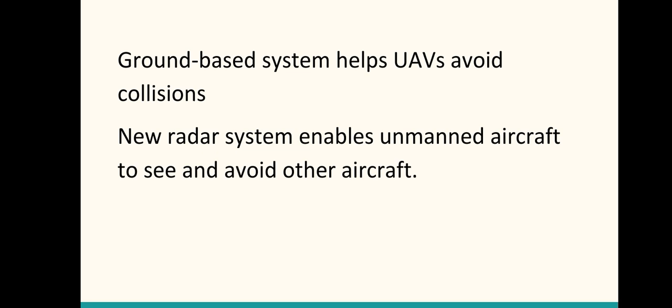The Federal Aviation Administration (FAA) is averaging more than 100 reports a month of interaction between unmanned aircraft systems and commercial or private planes. This statistic gives cause to ask, how can unmanned aircraft avoid in-air collisions?

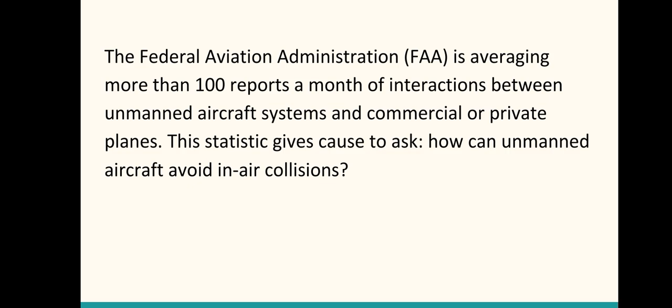For an unmanned aircraft system (UAS) to fly in civil airspace, it must be able to see, avoid, and remain well clear of other aircraft. With no pilot on board to spot approaching aircraft, another sense and avoid (SAA) technique is required.

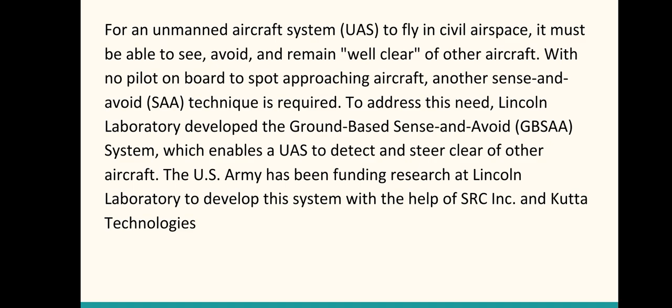To address this need, Lincoln Laboratory developed the ground-based sense and avoid (GBSAA) system, which enables a UAS to detect and steer clear of other aircraft. The US Army has been funding research at Lincoln Laboratory to develop this system with the help of SRC Inc. and Kutta Technologies.

Rather than using onboard sensors, which are still in the development phase, to provide the location of neighboring aircraft, the GBSAA system uses existing radars to locate nearby aircraft, including those not tracked by FAA systems.

Data gained from the radars are processed by unique algorithms so that the system can locate and prioritize the risk from all aircraft, and then issue alerts to the pilots of the UAS at risk and compute the optimal avoidance maneuver.

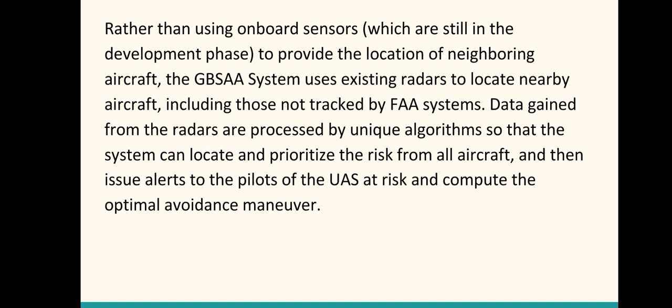This arrangement allows the GBSAA system to provide sense and avoid services to any size UAS flying within radar coverage without requiring the UAS to carry additional equipment.

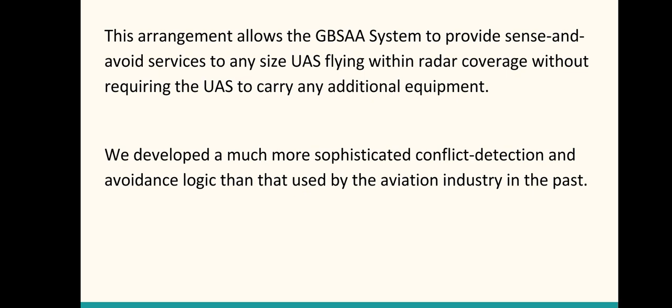We developed a much more sophisticated conflict detection and avoidance logic than that used by the aviation industry in the past. Lincoln Laboratory's developments in system architecture, threat detection, maneuver algorithms, and analysis in this program combined to offer an important advancement in the UAV industry.

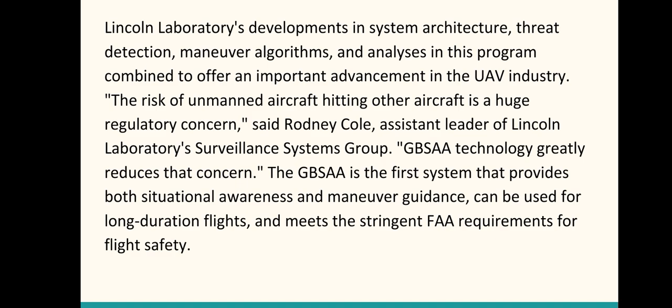The risk of unmanned aircraft hitting other aircraft is a huge regulatory concern, said Rodney Cole, assistant leader of Lincoln Laboratory's Surveillance Systems Group. GBSAA technology greatly reduces that concern. The GBSAA is the first system that provides both situational awareness and maneuver guidance, can be used for long duration flights, and meets the stringent FAA requirements for flight safety.

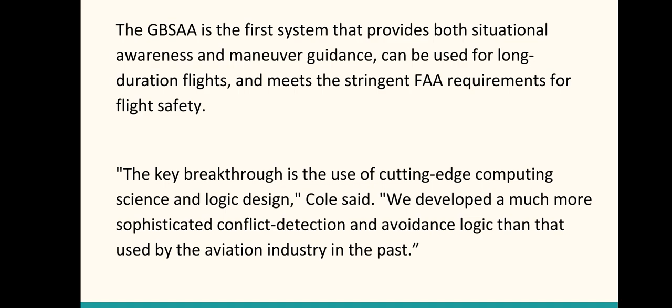The key breakthrough is the use of cutting edge computing science and logic design, Cole said. He said they developed a much more sophisticated conflict detection and avoidance logic than that used by the aviation industry in the past. The logic uniquely assesses not only the current location and velocity of each aircraft, but also the

uncertainty in these data and potential future threat aircraft maneuvers to determine the threat posed by each nearby aircraft, an optimal set of maneuvers for the UAS to regain a position of well clear, a priority ordered list of which UAS may violate the requirement to remain well clear.

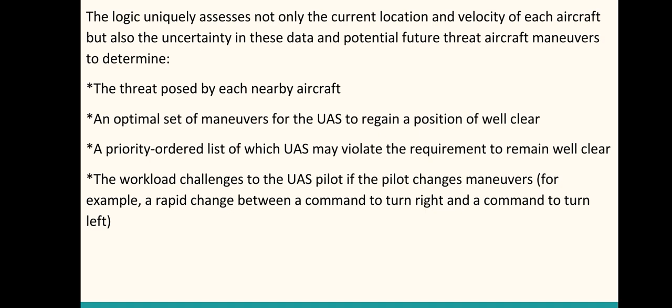The workload challenges to the UAS pilot if the pilot changes maneuvers, for example, a rapid change between a command to turn right and a command to turn left. This is the display of how they can operate. This is the alert display and one is the traffic display. Here we can see

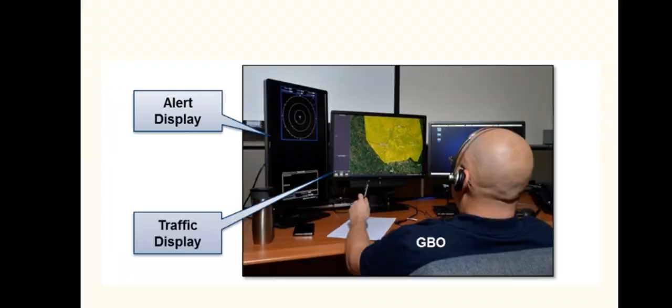the GBSAA operator shown above views data from radars and then communicates with the UAS pilot and the air traffic controller the best method to maneuver to avert possible collisions. Image courtesy of the research team.

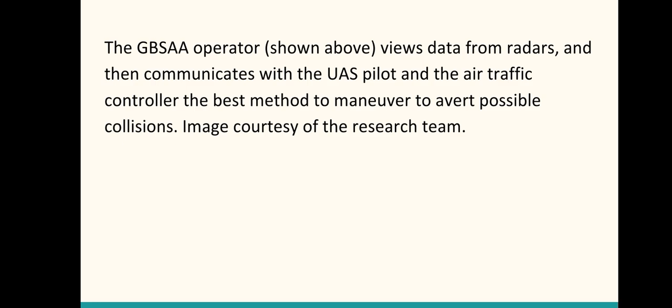The GBSAA ground control station processes data from up to 6 radars and assesses the air surroundings of up to 6 UAS. The GBSAA operator (GBO) shown above views data from the radars and then communicates with the UAS pilot and the air traffic controller the best method to maneuver to avoid possible collisions.

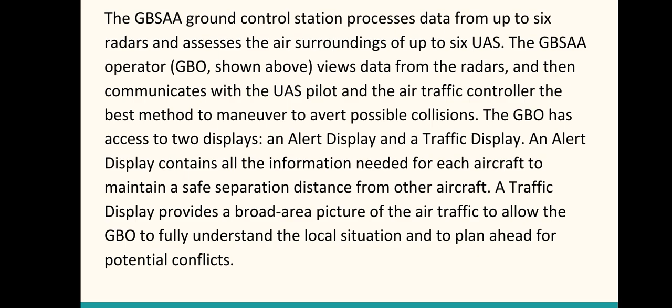The GBO has access to two displays, an alert display and a traffic display. An alert display contains all the information needed for each aircraft to maintain a safe separation distance from other aircraft. A traffic display provides a broad area picture of air traffic to allow the GBO to fully understand the local situation and to plan ahead for potential conflicts.

The core technology can be readily adapted to support drones engaging in package delivery, hurricane damage assessments, and search and rescue efforts, or applied in emerging technologies like automated air taxi services. Today, unmanned aircraft face a wide range of restrictions because of concerns about unmanned aircraft hitting other aircraft. The ability to detect and mitigate this risk will facilitate huge growth in the UAS industry.